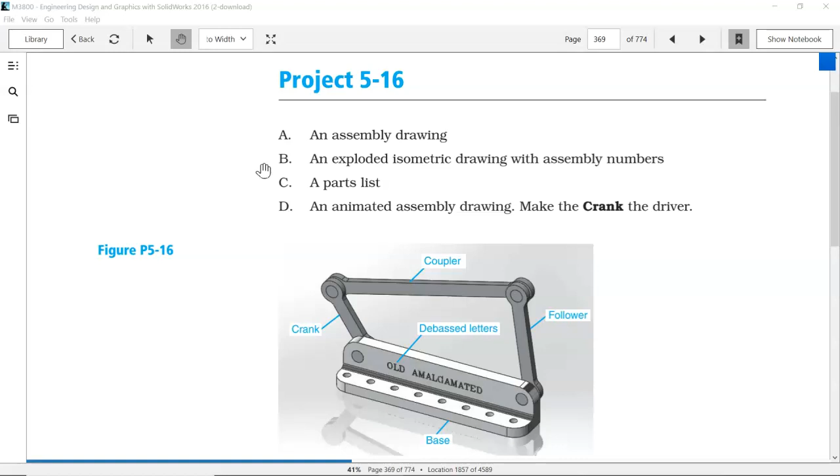Animation will be optional, and the list, sometimes we'll get to those. Sometimes we'll ignore them. So the more complicated ones will be optional if you have time to complete those functions.

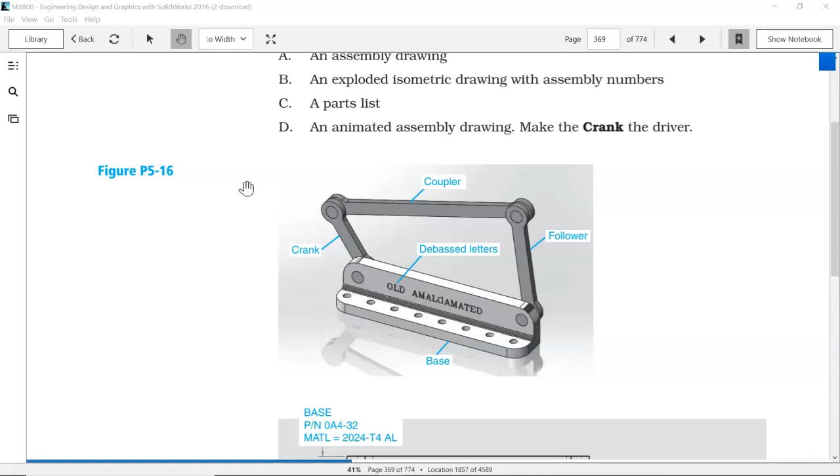So when we're looking at this and the movement of the crank, the coupler, I think that's meant to be debossed letters, so it's going to go in, and emboss is out, and then for just standard engraving, we would just lay the sketch on there so that the CNC tool could follow those outlines.

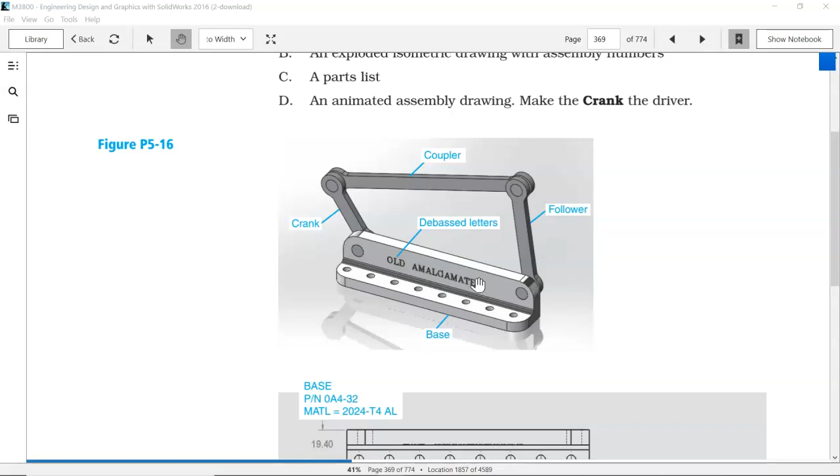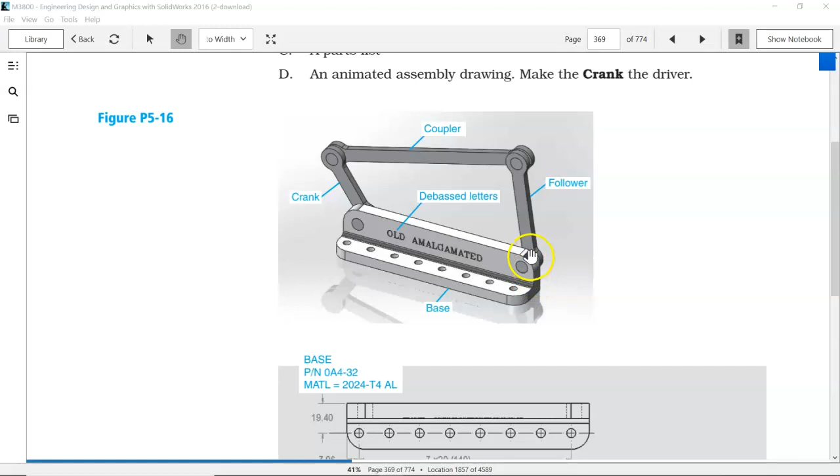So looking at this geometry from a manufacturing standpoint, the shape, if we stay more rectangular, the shape is that kind of L shape, and I need to turn my drawing tools on so we can see if this is going to work.

So when I look at these parts, you kind of are going to get into a mode where you will go with your first instincts. And my first instinct is this L shape over on the side. And if I can draw the lines, my touchscreen's sort of working. All right, close enough. And by extruding that out, whether this becomes the right plane or we draw it from this side, I'm not so concerned about orientation.

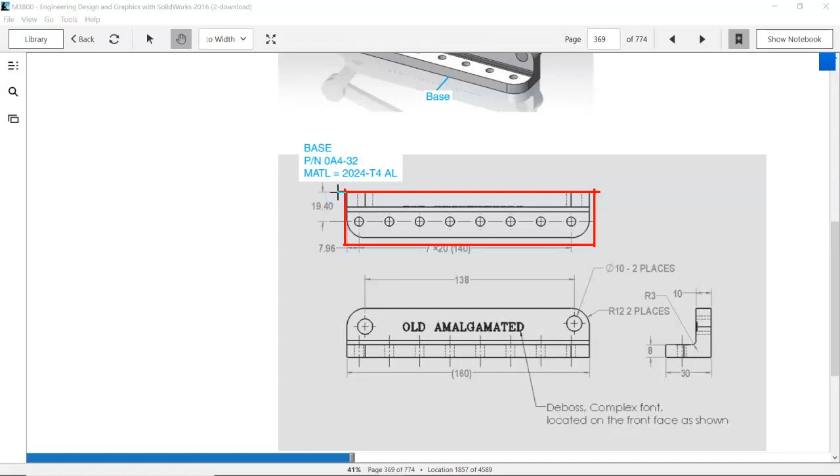We are going to locate one part of this to the origin. All right, so one of those corners is probably going to be the best choice there. If we have other choices, we could draw a top view and then add this geometry onto it to create that shape. Whoops. All right, well, having too much fun with the sketching tools, and then build that up.

Problem is that we're going to end up with multiple features. Looking at the dimensions, the 8, well, I guess I need to go to freehand there. The 8 and the 10, if those were the same, we could possibly do that as a thin feature and just draw the L shape and extrude it out and tell SolidWorks what the thickness is.

So again, there's going to be some terminology. There's going to be a lot of little nuance things that are going to show up in these drawings. For our first go around, getting into the mix, creating the geometry, adding the dimensions is the priority. Making it perfect comes later.

Looking at the material, the 2024 T4 aluminum, not necessarily a standard aluminum, probably available, but would not be my first choice. 6061 is going to be just the all-purpose. If you were bending this, but since it's not the same thicknesses with the 8 and the 10, not much point in trying to bend it. And the radius of 3 is really too tight for something like that.

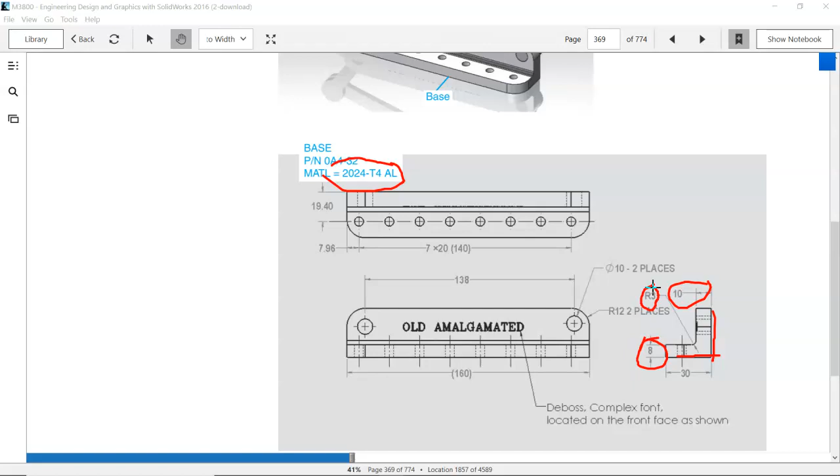So we're going to either be machining this or we're going to be buying an architectural structural L shape and then still have to do milling. So might as well just be making this out of a square and then machining that notch out of it. So there are going to be some machine processes that we're going to have to deal with.

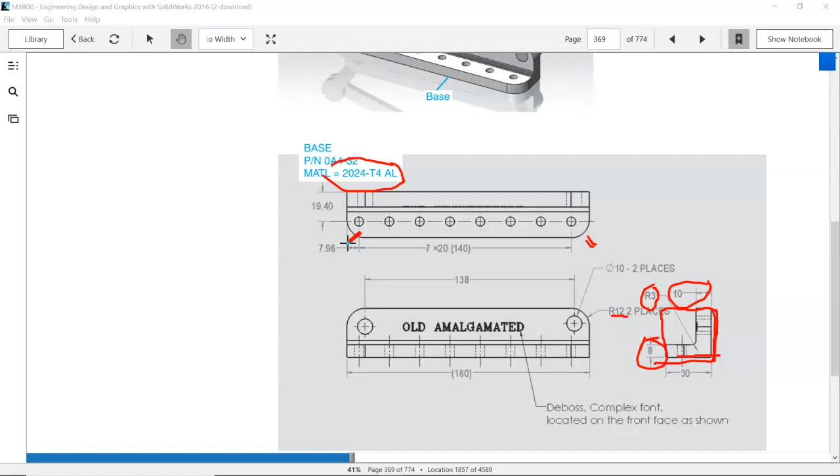The radius of 12, and assuming that it's radius of 12 here, not called out, and missing dimensions. The rule is if there's a missing dimension, for our purposes, you get to decide what that is. The assumption would be that the radius of 12, two places, would also be at those two places as well. So let's clear that out.

We have a hole pattern. We can do that as a linear pattern inside of the sketch, or we can do that as a feature pattern outside of the sketch. Right, so we'll probably take a look at both of those, and then this geometry will settle. All right, so that's our first. Oops, let's get out of the draw.

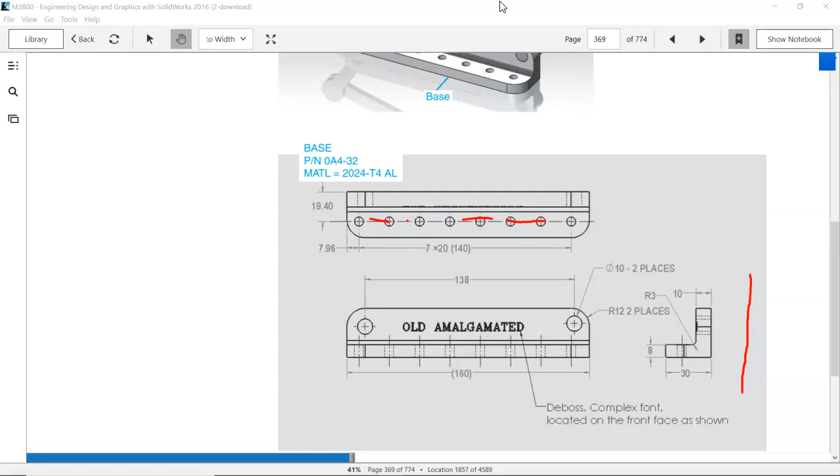Okay, so if we scroll down to the next part, we have another exploded view. We will be making the exploded view, and the exploded view lives in the assembly. There are going to be 3 of these, so we will do the file save as. So really what it's telling us here is the 3 lengths for the 3 different part numbers, and that will be fairly straightforward on our geometry.

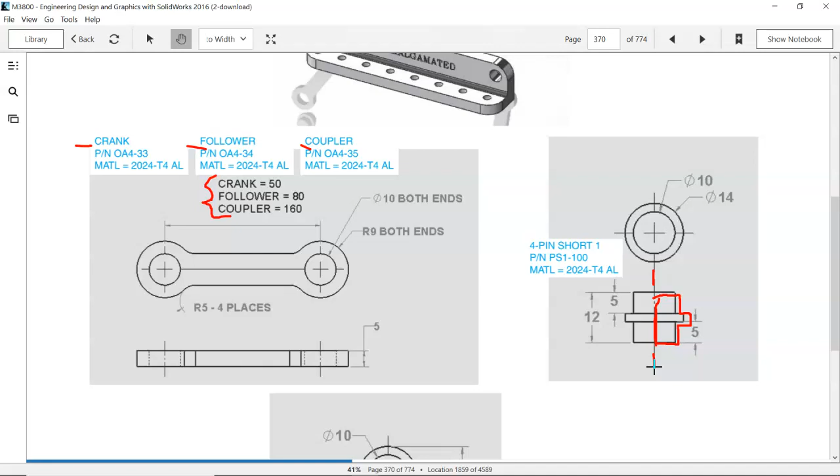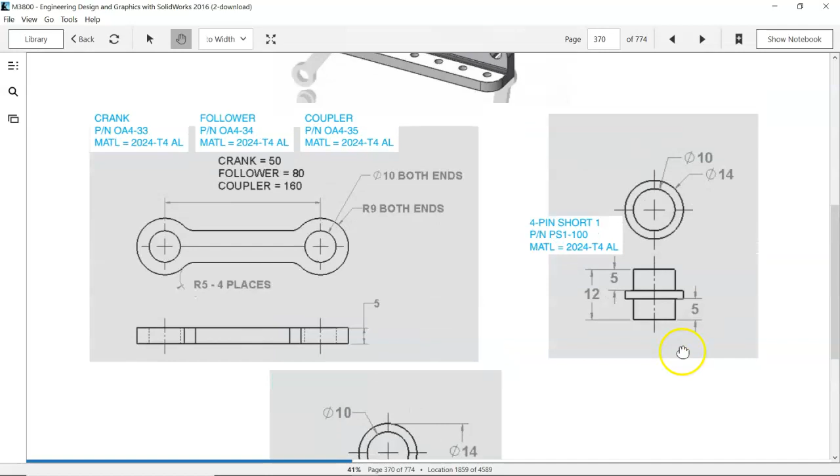The short pin, whenever we see the revolves, again we're going to take that quarter section and our center line, and that's going to be our geometry revolved around. And then we get to the long pin, and basically the same thing. So that gives us all of our shapes, and we don't necessarily have to do these as revolves. We could build those up like wedding cakes. It's just we get the most bang for our buck putting them into revolves.

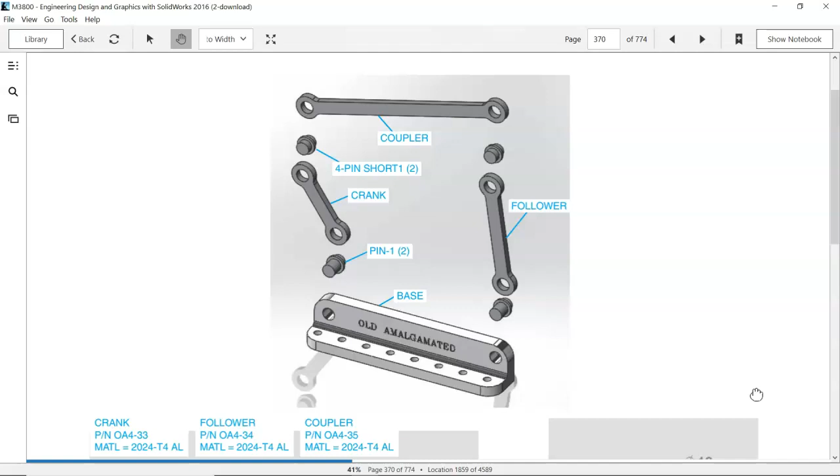So taking a look at the assembly and the geometry that we're dealing with, you can kind of start to formulate those strategies, make some quick decisions, and the difference between a purely conceptual model versus, hey, I'm having you reproduce this. In the conceptual, you're already going to start to develop images, and usually there's going to be some rough sketching, and we're going to try and use the tools that we have available to get as much information.

But there's always something on the conceptual side, the unforeseen, the overlooked, the didn't anticipate that, or anticipated it but didn't know exactly where it was going to go. So it's an evolving, iterative process. It does not become a perfect model in the first go around, and sometimes they don't ever become perfect models. We have to settle for good enough.